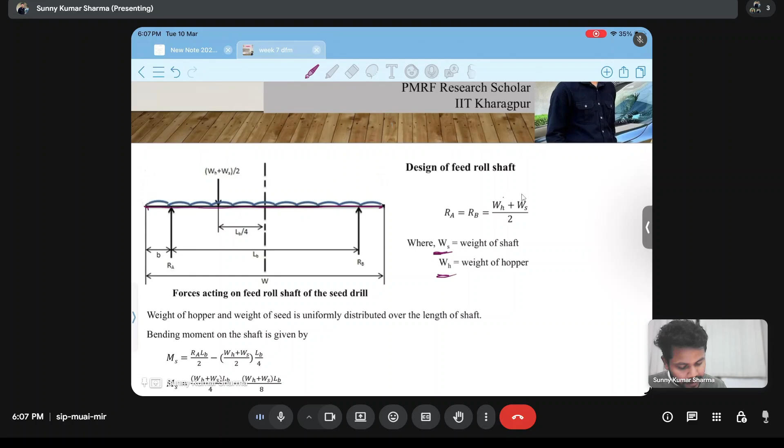So it has its own weight. Suppose WS is the weight of shaft and WH is the weight of hopper. So total combined weight this shaft needs to carry is WH plus WS, and this will be divided in two sections, means WH plus WS by 2.

And this WH plus WS by 2 is acting at a distance of LB by 4, where LB is the distance of this hopper and B is the clearance between the wheel and the hopper. This will not be used. So the seed will be uniformly distributed from here to here.

This RA is acting at a distance of LB by 2, and this RB will be acting at a distance of LB by 2. Good.

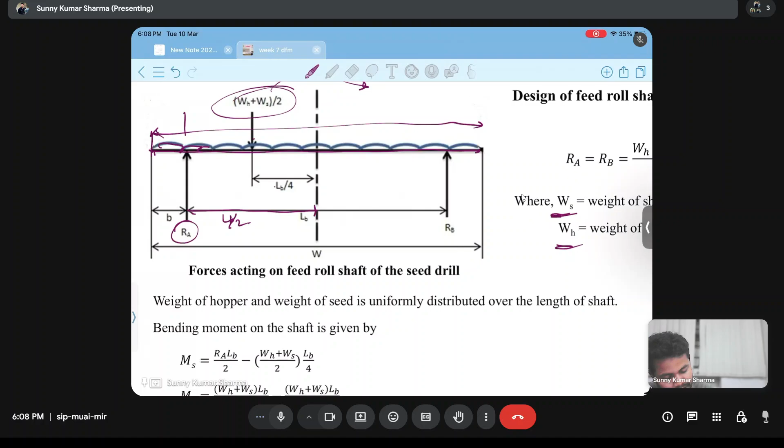So what will be all the forces acting on this shaft? This RA into LB by 2, and this WH plus WS by 2 into LB by 4. This will try to bend this shaft in anti-clockwise direction, and this RA will try to bend this shaft in clockwise direction. So RA you can take on positive side, and WH plus WS by 2 you can take on negative side. So what will be the bending moment?

RA into LB by 2 minus WH plus WS by 2 is acting at a distance of LB by 4. What will be the value of this RA? RA and RB, means RA plus RB will be equal to whole product, WH plus WS.

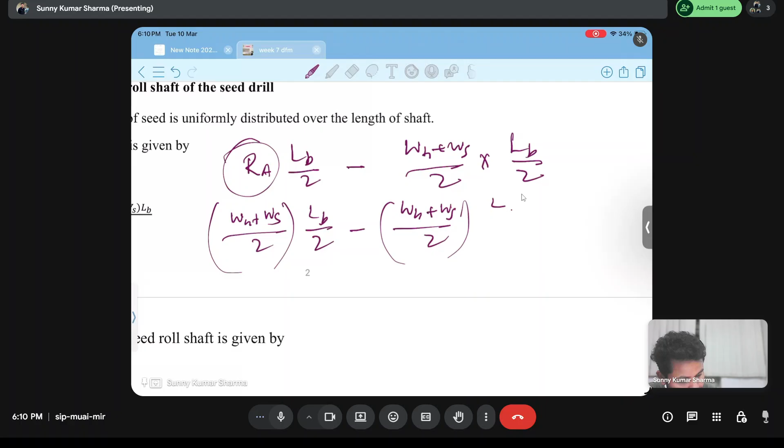This will be balancing each other, so RA will be equal to RB, which will be equal to WH plus WS by 2. So we can put that value here, means WH plus WS by 2 into LB by 2, minus again WH plus WS by 2 into LB by 4, this is actually the distance of LB by 4.

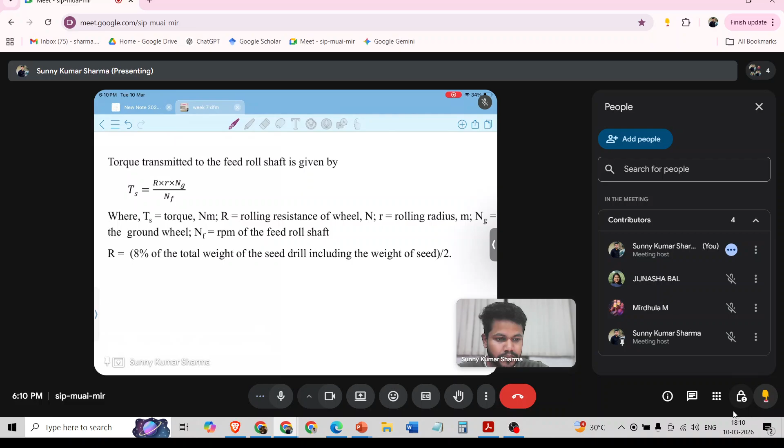So this will be the bending moment and torsion moment. Torsion moment we will calculate.

Torsion moment will be from the ground wheel. Because this is the ground wheel, what rolling resistance is this wheel facing? It will be facing a rolling resistance of R, which is 8% of the total weight of the seed drill, including weight of seed. That whole weight into 8% will be transferred to that shaft, and that will produce torsion in that shaft.

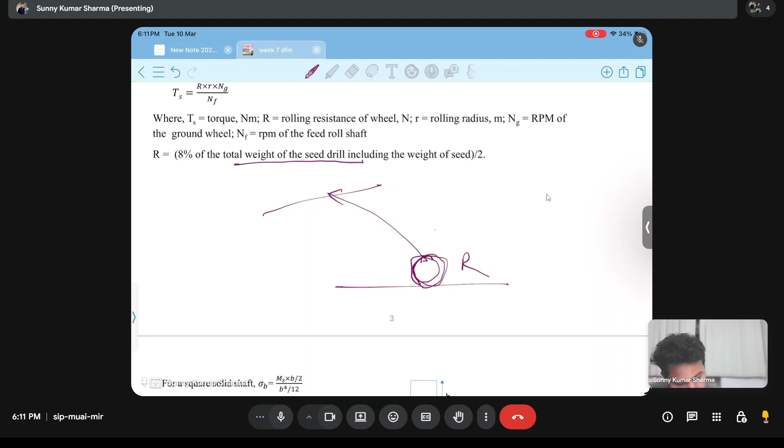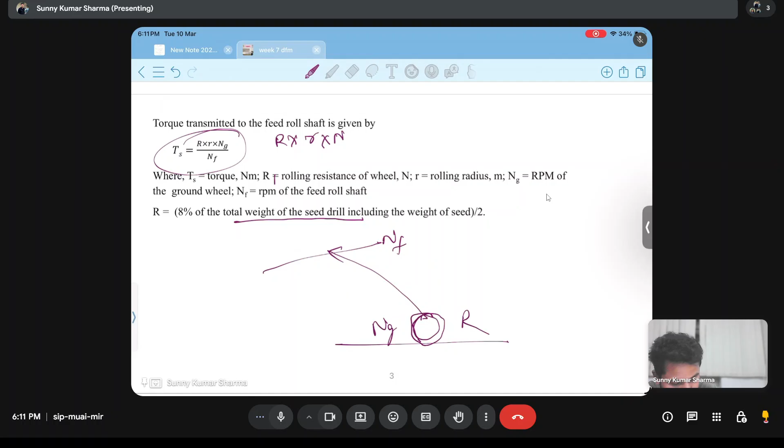So we will take the gear ratio. If the ground wheel is rotating at an RPM of ng, and this feed shaft is rotating at an RPM of nf, then that transmission ratio will be taken, and torsion moment will be the rolling resistance into the radius of this ground wheel R into ng by nf. So this will be the torsion and this will be the bending.

And since we have both torsion and bending, we will use this formula: tau max is equal to half into root under sigma square plus 4 tau square. From this we will solve to get the values.

If we are taking a square section, then for that we will use the formula for bending and torsion both, means y by I for a square section, and everything will be converted into only one unknown, that is b. And knowing sigma and tau max we have calculated, from there we can calculate the dimension of the shaft.

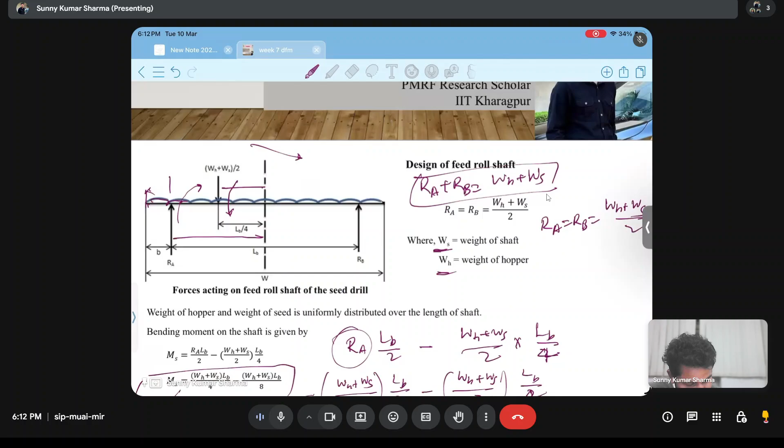For the design of furrow opener, we have discussed in cultivator that the same thing will be applied here. In the seed drill figure attached here, if you see a seed drill, you will find that the furrow opener is same as the working element of cultivator. So design of furrow opener will be same here also.

So for the design, what we are doing here is calculating bending moment and torsion. If the working element is shovel type or full sweep type, then only bending will happen. And if it is half sweep type, then torsion will also come into the picture.

So first we need to know which force will cause bending and which force will cause torsion, in every process we are doing. What force will cause bending on this shank? Is it the vertical or the horizontal force? Within that, we have to think.

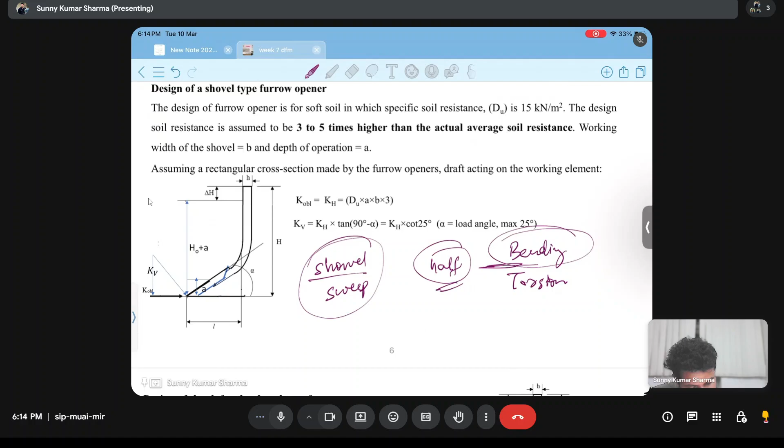So the vertical force will cause bending and the horizontal will cause torsion. Vertical force will cause bending in the shaft, not in the shank. This is just a shank, and this is the shaft, suppose 5 cm there.

So in this shank, which force will cause bending? The horizontal force will cause it. And on this shaft, all the vertical forces will cause bending. That thing you need to understand very well. On this shaft, bending is due to vertical force, and on this side, bending is due to that force.

You're getting it? Yes, sir. That is the key point you need to understand in this shaft.

In this frame, bending will be due to KV, and torsion will be due to KH. KH will cause torsion in this frame because this KH will try to turn or twist this frame, and KV will try to pull it down, this downward force. So KV will cause bending and KH will cause torsion in this frame.

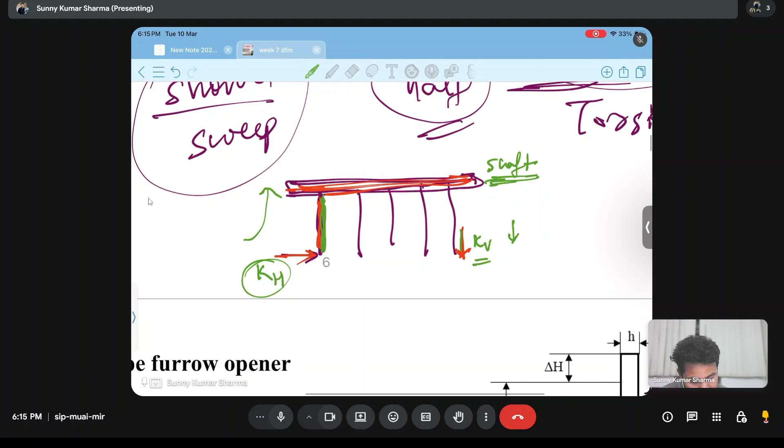And considering only this shank, this shank is subjected to bending due to this horizontal force, that is KH. And what force will cause torsion? KV? No.

First thing you need to check here is whether this working element is symmetrical or not. If it is symmetrical, then there is no question of torsion moment. If it is not symmetrical, suppose a half sweep type working element is there, then torsion will come into play.

This is half sweep type working element. This KH only will cause torsion. KH is causing torsion in this also, and KH will also cause torsion. KH will cause bending in this side, and KH will only cause torsion when it is not symmetrical.

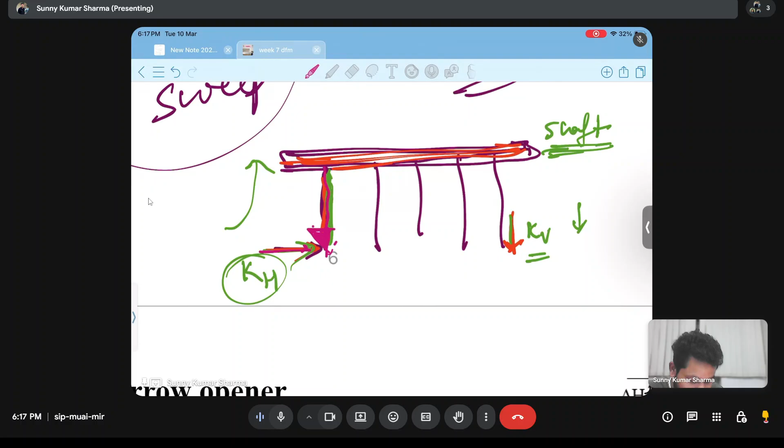Suppose symmetrical at this point, suppose at this point it will try to twist this side. Are you getting? This KH is now trying to twist. This KH will now try to twist this side. So both the forces will act at the same time.

If it's bending, then torsion will be there, or if it is symmetrical, then KH will cause only bending to this shank. And if this working element is not symmetrical, then that KH will only cause torsion in this position.

This thing we have discussed in cultivator class. And at what distance, that also I have shown, like at some distance, suppose working element is of width W, then at W by 2, W by 2, this force, this KH will act to cause torsion.

Suppose W is the working width of this unsymmetrical working element, then this KH into W by 2 will be the torsion moment for this shank. And this KH will cause bending at a distance of this height, this KH into H. This KH will only cause bending and torsion, but at different terms for bending and torsion.

If you visualize, then it will become more clear.

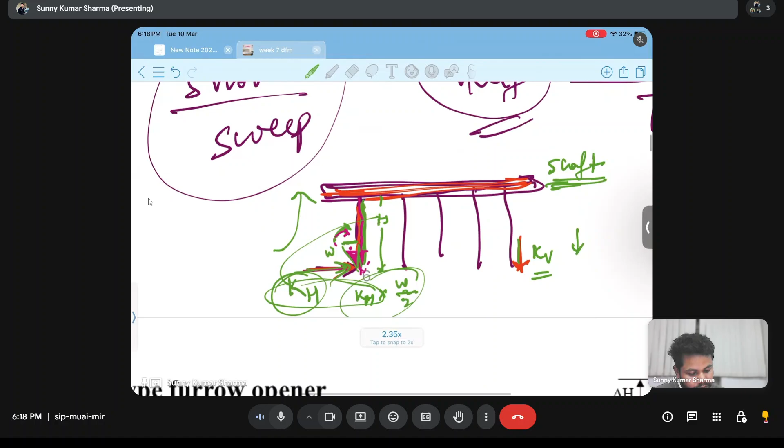So what will be the total height? That also we have discussed earlier. A max plus H1 plus delta H, whatever it will come. Delta H is where the frame is attached, so we can ignore this delta H. So H1 plus A max, H1 plus A, at this height KH will act and it will cause bending.

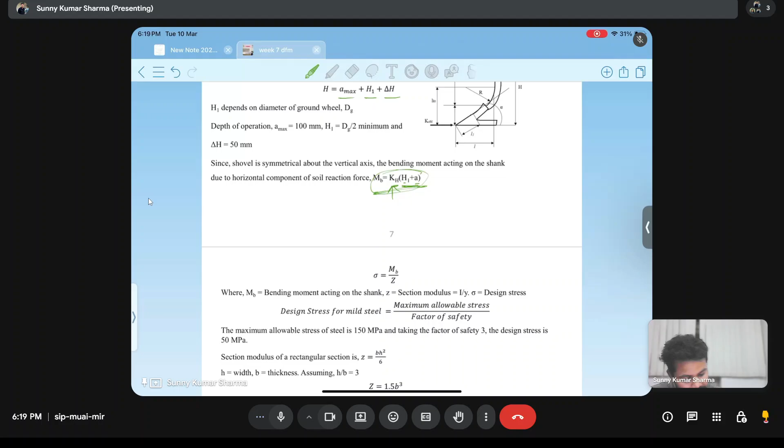I by y is called Z, section modulus, I by y. So this is the allowable stress, and we take some factor of safety.

So design stress will be divided with the allowable stress divided by factor of safety. 150 for 150 is for steel. So 150 by 3 is the design stress, 50 megapascal will be the design stress. That will be equal to Mb by Z. And for rectangular section, BH square by 6 is the section modulus.

And H by B ratio we take as 3 is to 1. And from there, we get only one unknown, that is H will be in terms of B, that is 3B. And from there, we can calculate B directly. So from that bending stress only we have calculated this design dimension concept, that is B.

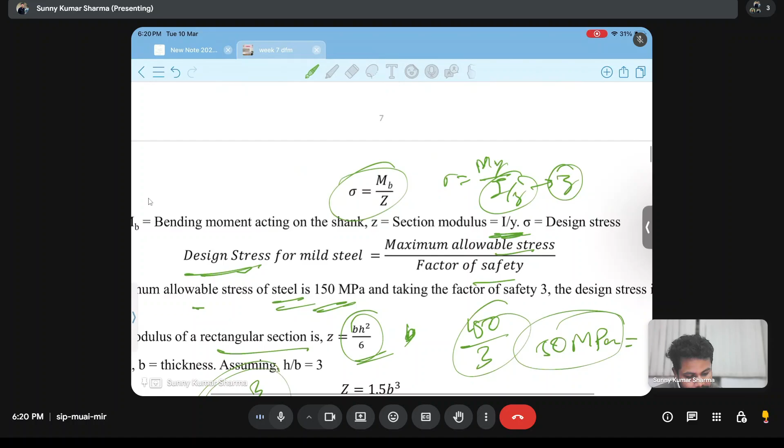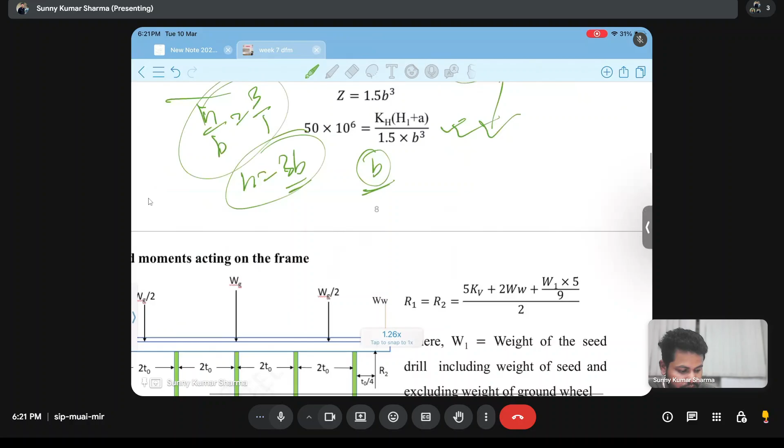Force acting in the frame. Now, just now we have discussed that for this frame, what will be the bend? For this frame, there will must be bending and torsion both. There is no symmetrical or non-symmetrical element.

This will be subjected to bending due to this KV and its own weight, that is some weight of this whole implement, that will cause bending. And torsion will be caused due to this horizontal force, that is unavoidable, that is KH will always be acting at this distance, at the distance of this shaft. So this KH will be causing torsion, and this KV and the mass of the shape will be causing torsion, will be causing bending. In this case, will be causing torsion.

So you can see here that forces, forces and moments acting on the frame. So R1 and R2, if it is a normal reaction, which will be equal to 1, 2, 3, 4, 5 KV.

This weight, and this whole element has a weight of W1. So weight W1 will be the weight of 9 times. So for 5 times, the weight will be 5 W1 and 2.

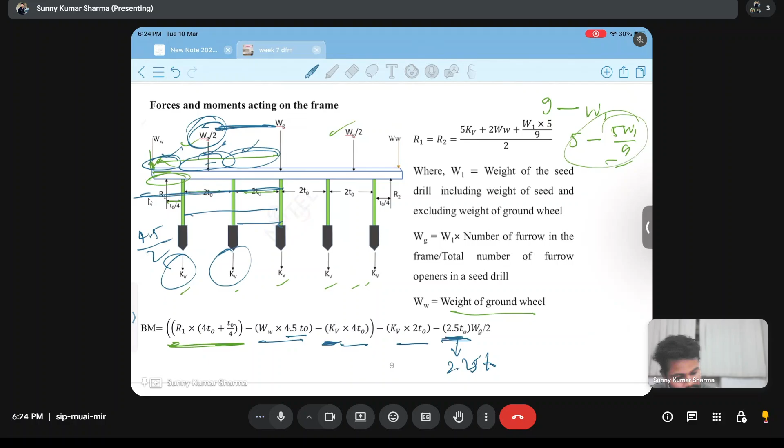So WW is acting at a distance of 4.5 T0, and KV is acting at a distance of 4T0, 1 kV is acting at a distance of 2T0. So 4T0 and 2T0, and the weight of the frame, total weight of this central element, will be divided into parts, that is WG by 2, and it is acting at a distance of this whole weight minus by 2, that is 2.5 T naught. 4.5 by 2, that is 2.25. It should be 2.25 T naught.

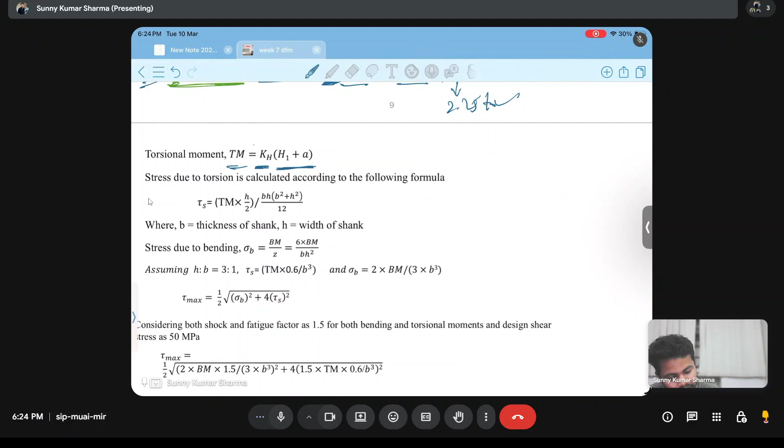So the values now we are knowing, T naught we are knowing, WG we will be knowing, R1 we will calculate from this process, and we can calculate bending moment. And what will be the torsion moment? Torsion moment will be due to KH at the height of shank, so that will be KH into the height of shank. That will cause torsion, and this will cause bending. And from there, we will use that formula: tau max is equal to half root under sigma square plus 4 tau square, and that will give you the design dimension, that is B.

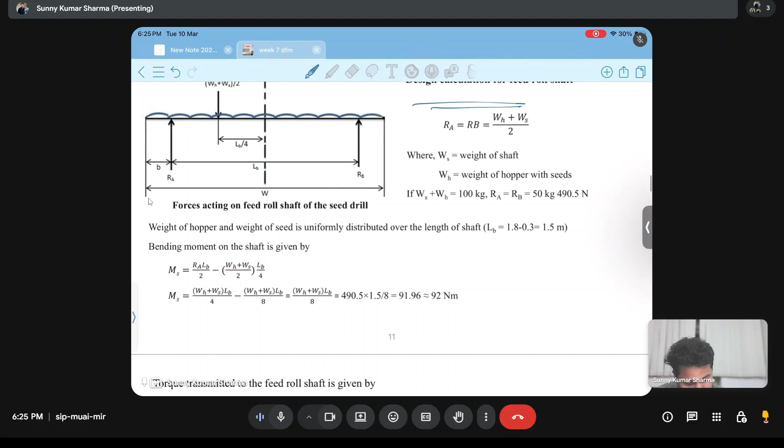So that was the procedure of calculating for designing the feeder shaft and frame. And if we have known values, then you can see the procedure, same procedure that we followed for this design, for this feed roll.

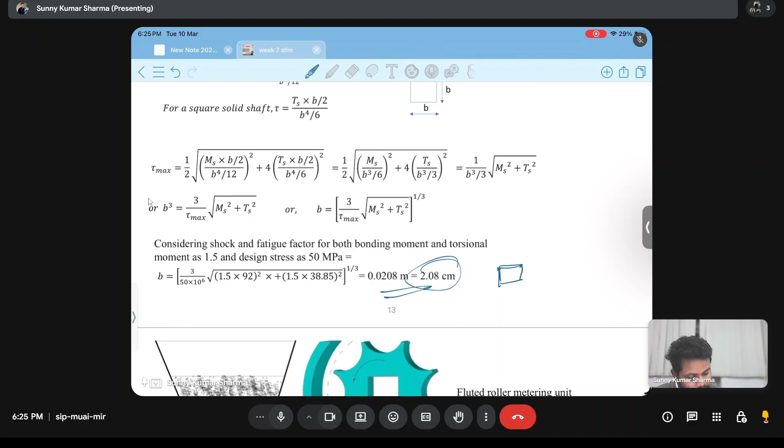Bending moment has come 92 Newton meter. Torsion moment has come 38.85, and we have got B, that is design of shaft dimension, square shaft dimension of 2.08, with a square shaft dimension.

Now the next thing is the metering unit, for fluted roller. This is the design of fluted roller. This is the most complicated thing in the seed drill design. It has two diameters, that is the first thing you can observe. This is the larger diameter, larger radius, that is d by 2. This is the smaller radius, that is small d by 2. But you can denote it as capital R or small r. That is the one thing you can observe.

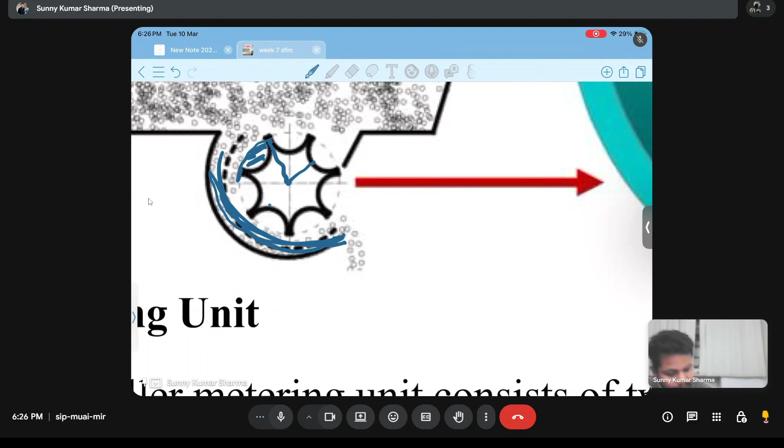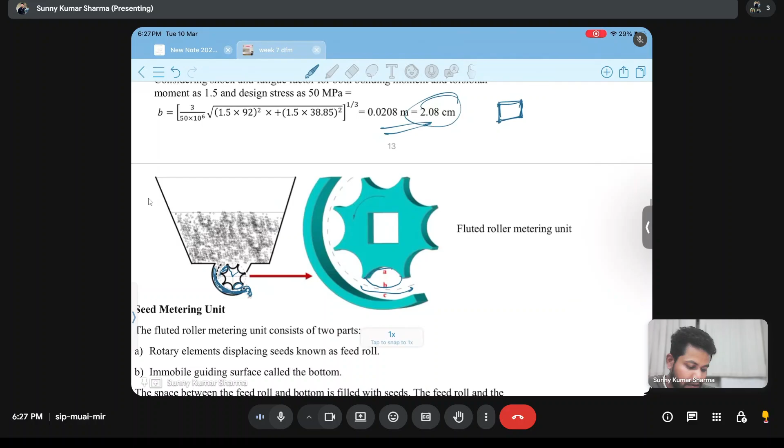Then the second thing you can see: it has two areas. One area is this, and one area is this one, where the grain is sliding. So what is the weight of seed that is coming out in one revolution? We need to consider the area of this unit and the area of the seeds which is sliding also. So that will be coming into picture. Here you can also see this area is there and this area is there. So we will derive the formula for knowing what is the volume of seed coming from this feed roll, from this fluted roll.

So for that, suppose this is the fluted roller. Can you visualize it? It will be having two layers, one internal area and one external area. It will be comprised of this A1 and A2, two areas will be there. And like this, there will be a number of flutes, that number of area we need to consider, and that will be divided into length, area, into number of flutes, into length. That will give a rough picture of what is the volume of seed coming.

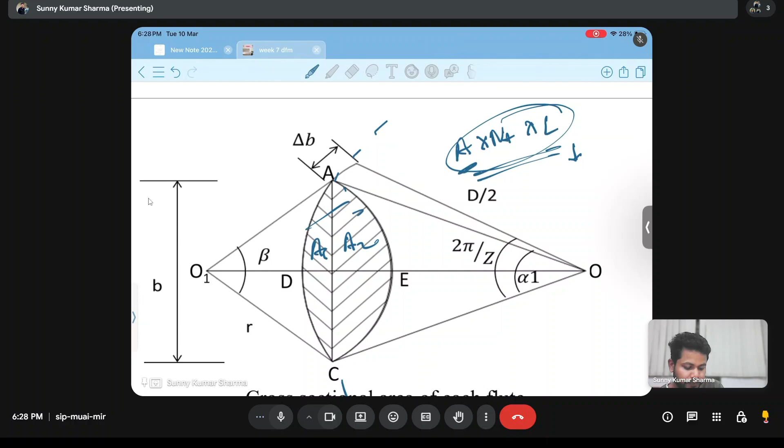Are you getting? You multiplied area into number of flutes. That will give total area of that fluted roller which is of our interest. Only in this area seeds are there, and suppose there are seven flutes, so there will be seven types of this area. And this area is comprised of one external, of larger radius area, and one having smaller area. See this picture. From here you can see there are two areas: one is this one, and one is this one. Getting?

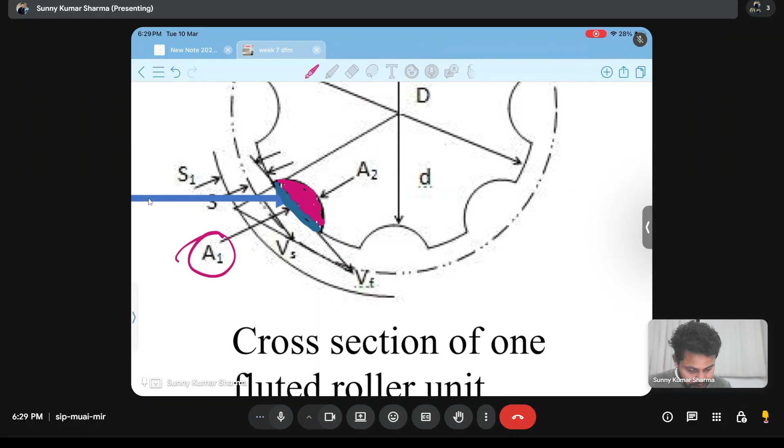Yes sir, to that earlier section you have shown, overlay that one. So this A1, just now I have written it here, this is A1. That is in the picture I have shown it as A1, and this is A2.

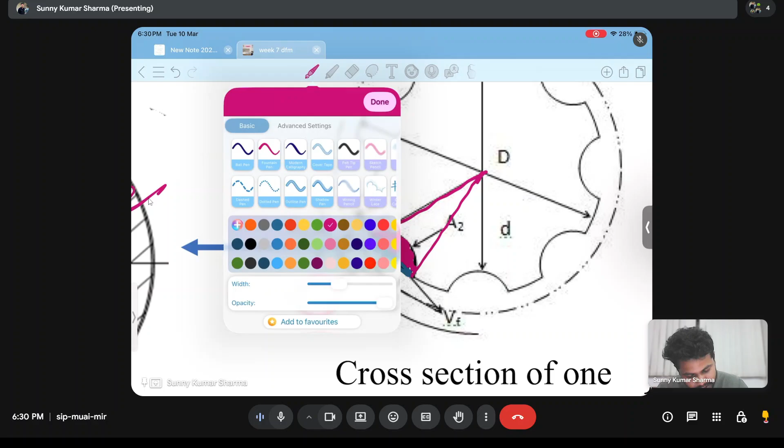It is also shown here. See, this is A1, this is A2. This smaller one, this diameter is small, and for this diameter, this circle is large. It has a larger circumference and a larger radius. For this circle, it will be having a smaller radius. So that thing has been shown here - this is smaller radius, this is larger radius. Getting?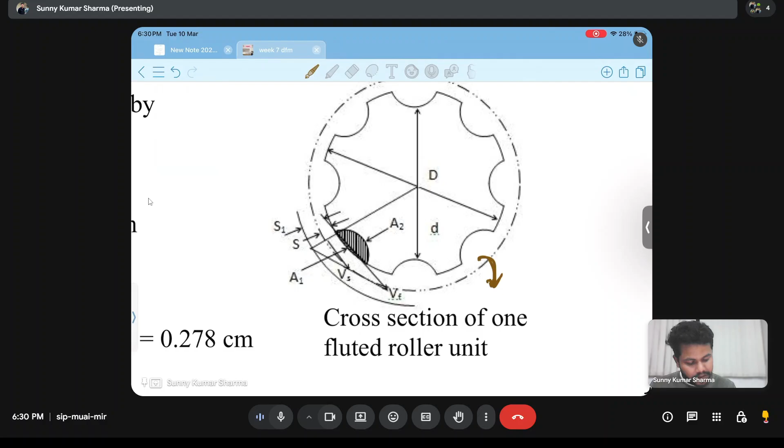Now the concept you need to follow here is what will be the volume of seeds coming out from this feed roll. Suppose some VS is coming, and from the calculations of what will be the seed rate - suppose 100 kg per hectare is the seed rate - from that, what is the desired volume of seed we need, that is the volume of seed coming when this ground wheel is rotating. When this ground wheel is rotating, that feed roll is rotating, that feed shaft is rotating, and that is giving some volume. From that we have discussed many numericals in last class.

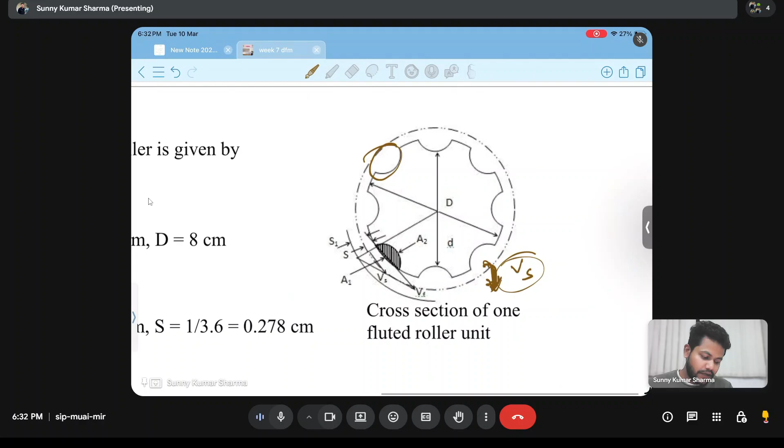Suppose in one revolution of ground wheel, this feed roll is rotating two times. That will give us what is the volume, or what is the amount in kg, of seed that is dropping from this feed roll. That is one procedure we have seen inside the feed roll - what is the volume of seed coming from this. That is from there one volume is coming, and from this calculation, what is the speed and what is the gear ratio - from there one volume is coming. So suppose from this example we will get it.

Suppose what is the area covered when the seeding machine is operating at a speed of 4 km per hour, and it has a working width of 9 into 20 centimeter. So what will be the area covered per minute? 4000 by 60 meter per minute into 9 into 20 by 100 meter. This is the width it is covering, and this is the distance it is covering in 1 minute. So when you do this multiplication, you will get that 613.33 meter square it is covering in 1 minute.

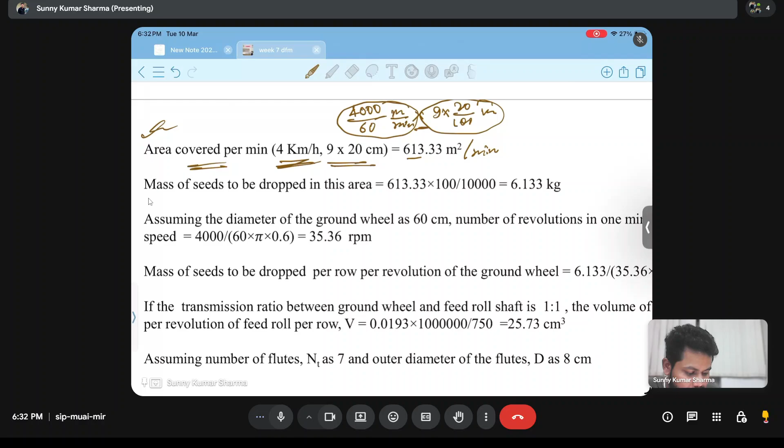Excuse me, sir. Sorry, sorry for the interruption, your voice is not very much clear, sir. Yes. No, your voice is not very much clear actually. Okay, I will wait 1 second. Is it better? No sir, just speak on, sir. Wait 1 second. Now I think it's okay, sir. While I am speaking, I'm getting that resound also. Wait, let me rejoin, I will rejoin. Hello. Yeah, now it is okay, sir. Is it okay, or you are just saying okay? It is okay, sir, it is okay. Now there is no disturbance. Okay.

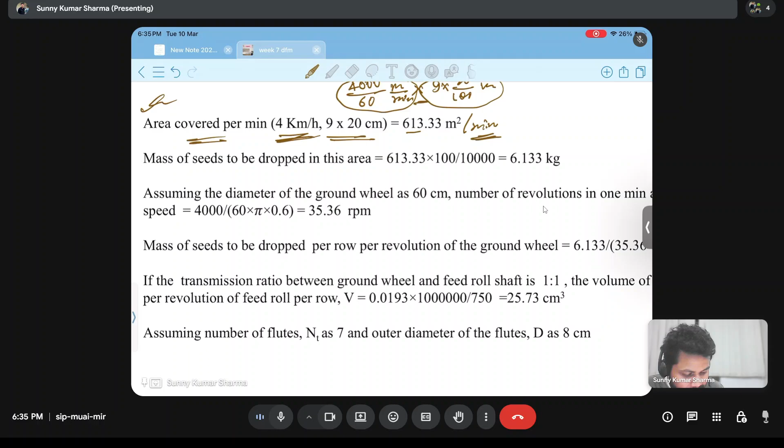So suppose the seed drill is covering this area in 1 minute, and mass of seed to be dropped, that is the seed rate, is 100 kg per hectare. Suppose 100 kg should be dropped in 10,000 meter square. So for this area, what will be the seed in kg? For 1 meter square, it will be 100 by 10,000 kg, and for this area it will be this into amount of 613.33. So we will get 6.133 kg. For this area, 6.133 kg should be dropped.

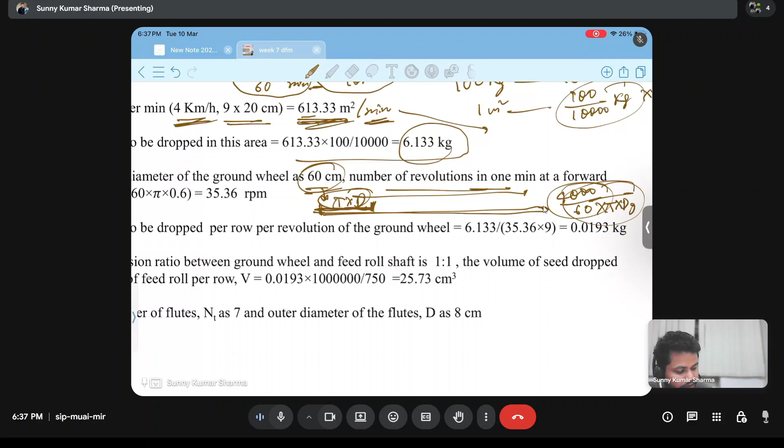Assuming the diameter of ground wheel is 60 centimeter, what will be the number of revolutions in 1 minute? In 1 minute, how much distance is it covering? 4 kilometer per hour means 4000 meter by 60 - that is the distance it is covering in 1 minute. This is the diameter of the ground wheel, so from there circumference will be pi into d. This is the distance it is covering in one revolution. Total distance it has covered in 1 minute is 4000 by 60, so 4000 by 60 divided by pi into d gives the revolutions per minute, which will be 35.36. So this is the RPM of the ground wheel. And for this RPM, the mass of seeds to be dropped per revolution - in one revolution, what is the mass of seed being dropped?

6.133 divided by 35.36, that will be the mass of seed in one revolution. And it has 9 rows, so that will also be divided.

So this amount of seed for one revolution, we will divide by number of revolutions, and number of rows will also be divided. So this will give 0.0193 kg.

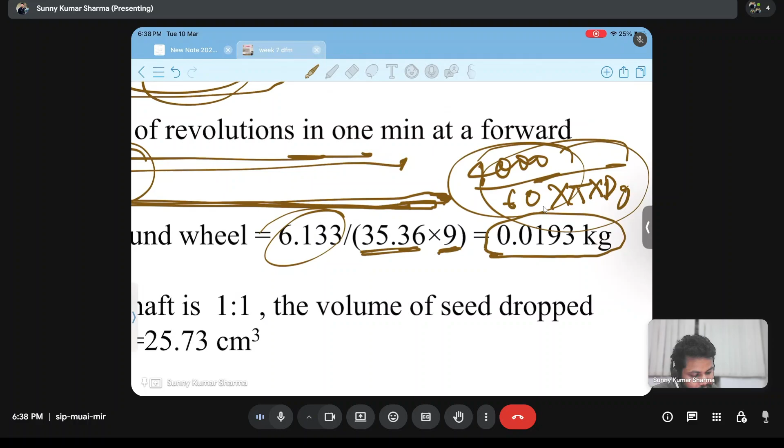So this amount of seed is being dropped by one fluted roller in one revolution. In one revolution, this amount of seed is being dropped one time, meaning from one time this amount is coming.

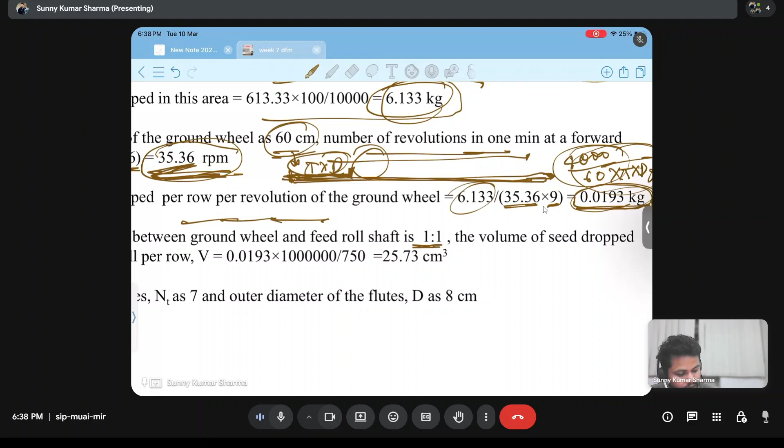And if the transmission ratio from ground wheel to feed shaft is 1:1, that means in one revolution of ground wheel, the feed shaft is rotating one time.

So this amount of seed will only be coming out. And suppose for one ground wheel revolution, two times that shaft is rotating.

So what will be there? This seed is coming in one revolution of ground wheel, and in that same time, the feed shaft is rotating two times.

So in one time, what will be the amount of seed coming from that metering unit? This amount divided by two.

Are you getting? Yes, sir, I'm getting. Jigyasa, are you getting? Yes, sir.

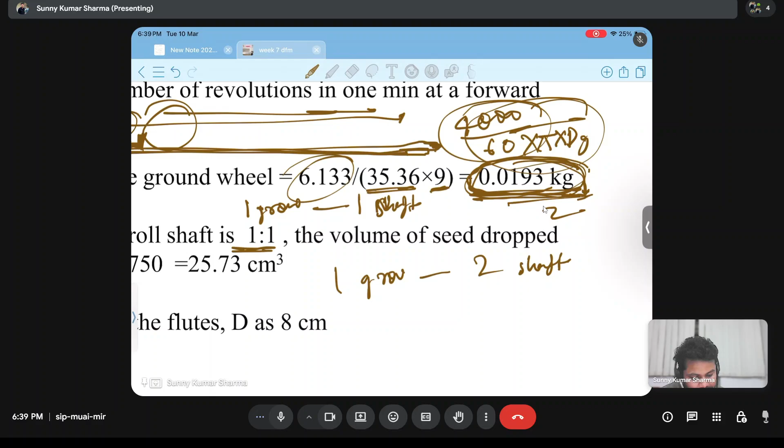So if in one revolution of feed shaft, ground wheel is rotating two times, then what will happen?

Sir, come again, sir.

If ground wheel, if for one rotation of that feed shaft, the wheel is rotating two times, then what will happen?

This is the feed shaft. It is rotating two times, and in that two times, this ground wheel is rotating only one time.

Sir, can you just zoom out that value, sir? Still more, sir.

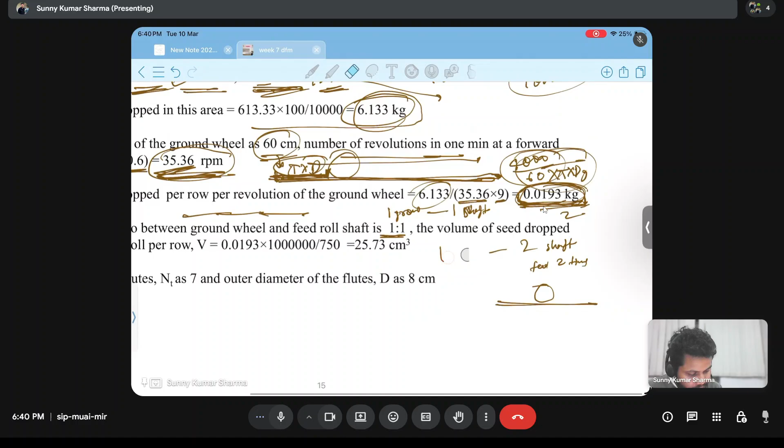This concept needs to be very clear, then only the schedule problem will be solved very easily.

I'm saying that in one revolution of ground wheel, feed shaft is rotating two times. Then what will be the effect of that transmission ratio on this amount?

Volume will be reciprocal. Here it is 1:1, meaning one revolution of ground wheel rotates the feed shaft one time. And if one revolution of ground wheel rotates the feed shaft two times, then what will happen?

The volume of that seed which is dropped, what will happen? Volume of seed dropped per revolution by the feed roll will decrease, it will decrease by 2 times.

We need to consider only one revolution. For 1 ground wheel revolution, it is rotating 2 times. So this amount is coming in 2 revolutions of the feed shaft.

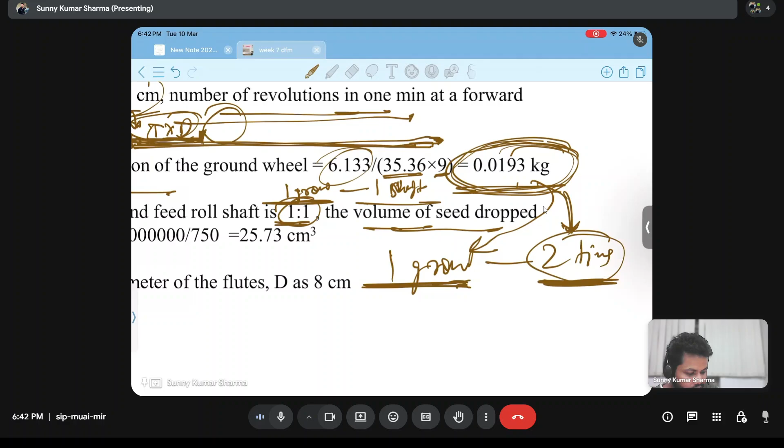Either you can say this amount is coming in 1 revolution of ground wheel, or you can say that this amount is coming in 2 revolutions of feed shaft. This is the concept you need to understand, that this amount is coming in either 1 revolution of ground wheel or 2 revolutions of feed shaft. That will make you clear.

So this amount is coming in 2 revolutions of feed shaft, meaning 1 revolution of feed shaft will give this amount divided by 2. That is the importance of that transmission ratio. Okay, sir. Okay.

So this amount is coming, and density of seed is here taken as 750 kg per meter cube.

Meaning in 1 meter cube, the mass of seed is 750 kg. So this kg will be converted into volume, that is 25.73 centimeter cube, in 1 revolution of feed shaft, roll shaft.

In 1 revolution of feed shaft, what is the volume coming? 25.73 centimeter cube.

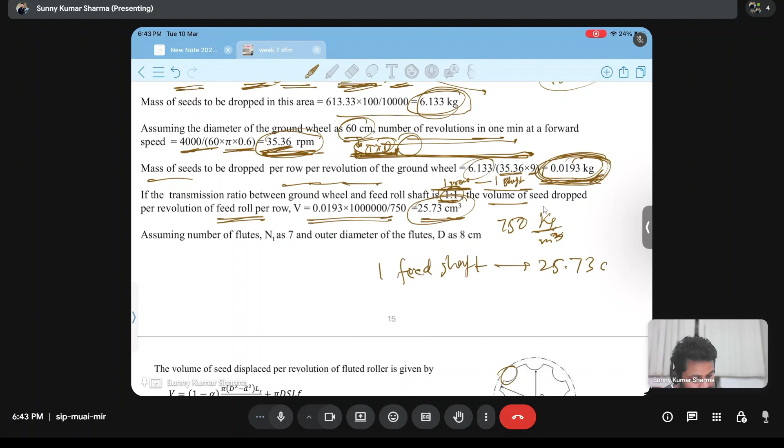This is the calculation from the ground wheel side, like what is the speed at which the seed drill is operating, and what is the transmission ratio.

From that side, we have found that 25.73 centimeter cube should be dropped by the feed shaft in 1 revolution.

This part is complete. And another part which we are discussing from the beginning is what is the volume that should be coming out from this dimension, which we will also discuss.

So it has two formulas. Volume of seed displaced per revolution by the fluted roller is given by this formula.

This is a direct formula for when we know the diameter, that is the larger diameter and the smaller diameter.

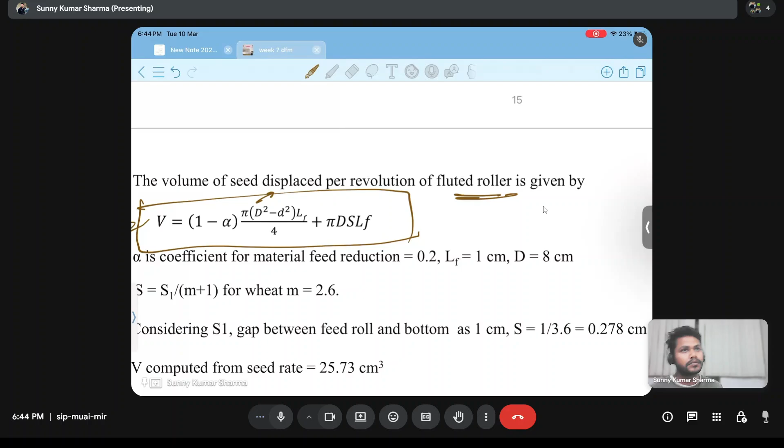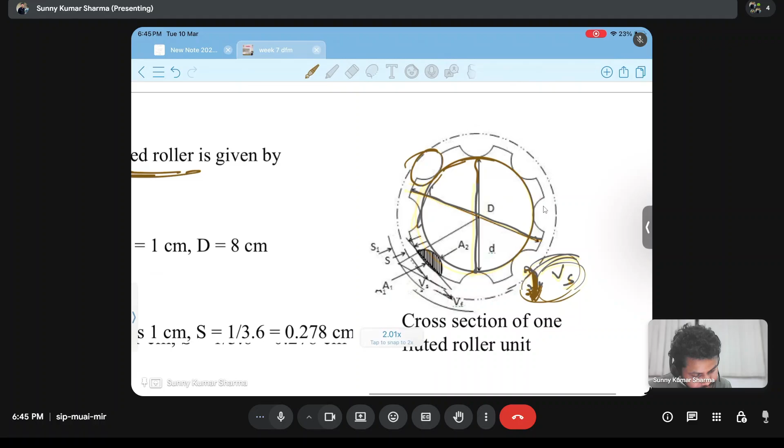If the porosity is suppose alpha, say 20%, that amount is occupied by air. So we do 1 minus alpha into pi D square minus d square, where D is the larger diameter and d is the smaller diameter. This subtraction gives us the area for the larger diameter minus the area for the smaller diameter. So 1 minus alpha is the porosity, and LF is the length of flute.

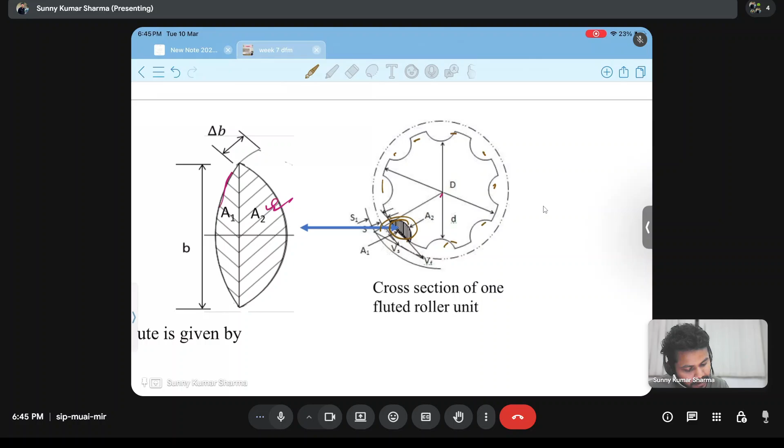Another way we were discussing is that this area multiplied by the number of flutes, along with the area and length of flute, will be used. For calculating this area, it is comprised of two areas, A1 and A2, and we will derive how to calculate A1 and A2.

A1 is the part of this larger circle having radius d by 2, and this other area is part of a smaller circle.

Sir, both the formulas are accepted? Both formulas will be acceptable, it depends on what is given. If, suppose, just scroll up sir... okay, so here you are telling that we are taking the area of a circular ring, using the larger diameter, and subtracting the smaller diameter from the larger diameter, to get the area of that circular ring, right? Yes. But if we take the circular ring, we are covering some area which is not dropping the seed, right? That's why this formula will be more suggested to use. Yeah, that's what I'm asking.

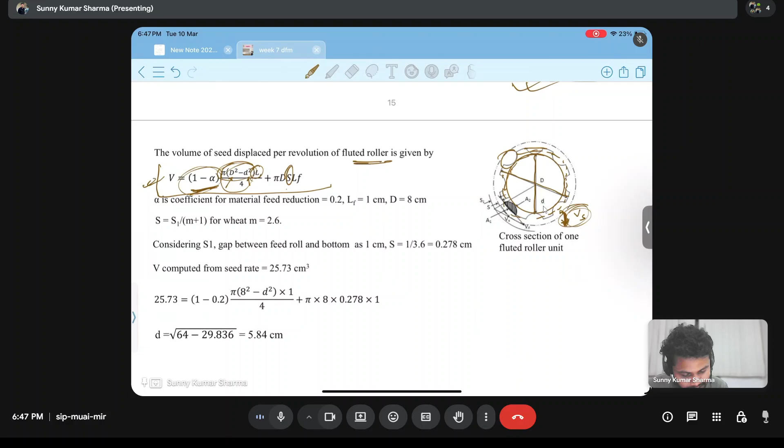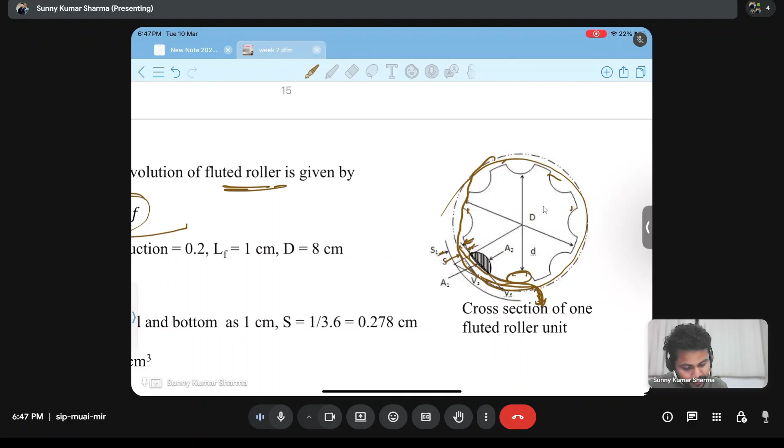Here, for calculation of this area, S is also important. This part is indicating the volume of seeds which is sliding along this periphery - this is S1 and this is S. So this part of the seed is also coming out and should be considered; that part plus this part need to be added to give the volume. For calculation of S, we have the formula S1 by M plus 1, and M for wheat is 2.6. From there S will be calculated, and then this diameter can be calculated.

Actually, I got that, but I think the second formula is more relevant, because we are exactly taking the volume of the semicircles, right? That is more accurate. More accurate because in the others, we are also covering some area which is not dropping the seeds. Yes, okay, carry on.

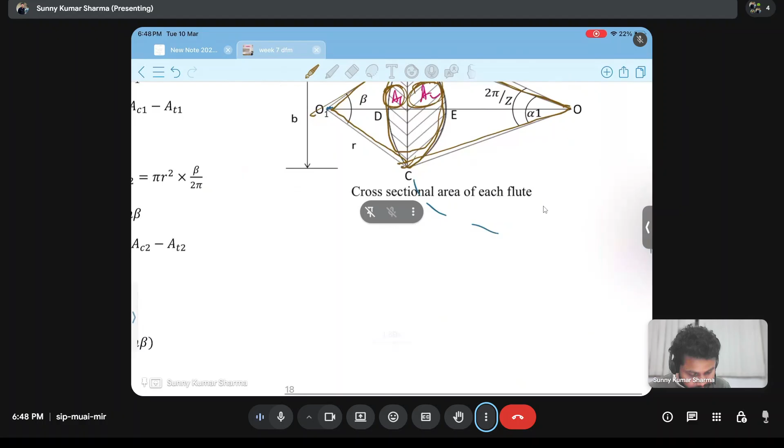This area is A1 and A2. For calculating A1 - what will this be? This conical shape is called a sector, right, one sector. Yes, correct, we'll call it a sector.

So what is the area of this sector? For 2 pi, the area is pi d square by 4. So for alpha, this area will be pi d square by 4 into alpha by 2 pi. This is the area of the sector.

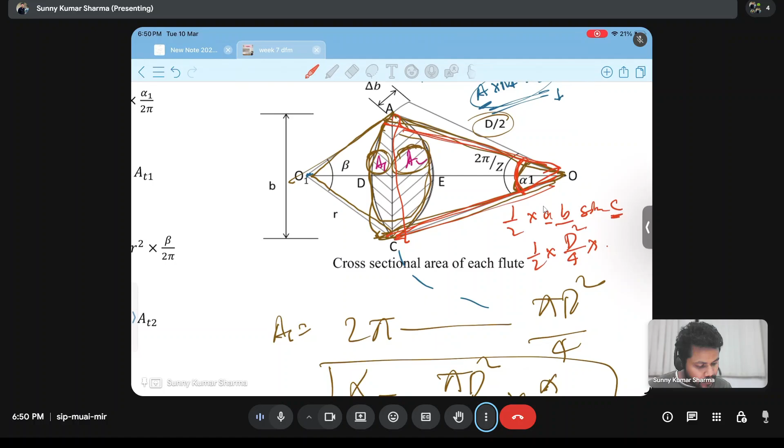That larger sector area should be subtracted by the triangle's area. For the triangle's area, one formula is half AB into sine C, where A and B are the sides of the triangle and C is the included angle between them. Here this is d by 2, and this is sine alpha. So half into d square by 4 into sine alpha will be the area of the triangle, giving d square by 8 into sine alpha.

So this area minus this area becomes d square by 8 into alpha minus sine alpha. This is the area of A1.

B is regarding that thing. This area which we are not considering, delta b, which is not dropping the seed, that thing we also need to consider. And that area, if we are knowing A1 plus A2, then number of flutes we are knowing and length we are knowing. Area, that is dropping the seed into number of flutes, that will give total area into the length, that will give volume.

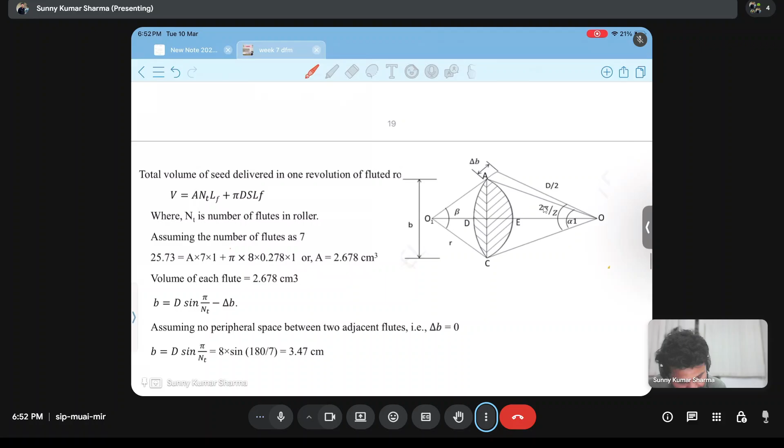What will be the gear ratio? What is the ground wheel? From that side we are getting one volume, and what one volume we are getting from this side. So we need to equate both the equations to get the desired value which is being asked, which is to be designed.

So 25.73 is the volume of seed being dropped in one revolution of ground wheel, and area into 7 number of flutes into capital D is 8 into 0.278 is the S, then 1 is length of flute. From here we can calculate area as 2.678 centimeter cube.

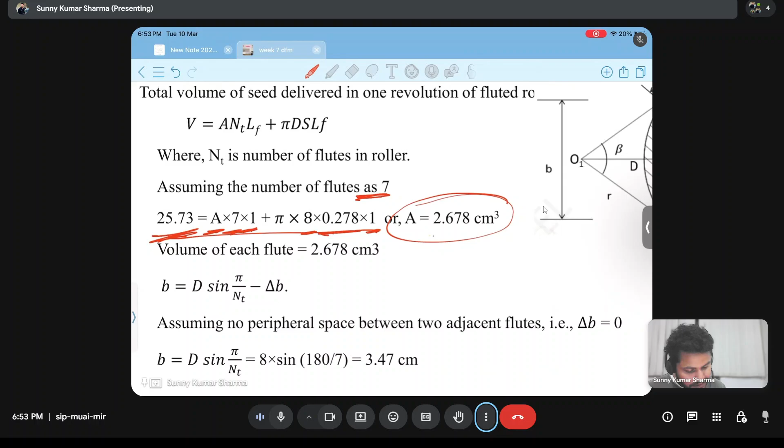And B, we have this formula, so we can calculate B also, 3.47. So here, if suppose I think B was asked, so this was done.

And design of hopper is also there. Design of hopper is simple only. First you need to know what is the hectare per hour from field capacity. Actual field capacity, first you need to know. For that, you need to know the width. W into S by 10 is the famous actual field capacity formula. You need to multiply it with field efficiency. You will get what is hectare per hour.

So for that hectare per hour, you need to know at what time you need to refill. Suppose 1.4 hours, you are refilling the hopper. So this amount, this area, this hour will be multiplied and 0.576, so this much area is being covered. And what is the seed rate? Suppose 100 kg per hectare. So this will be the amount of seed for which the hopper needs to be designed.

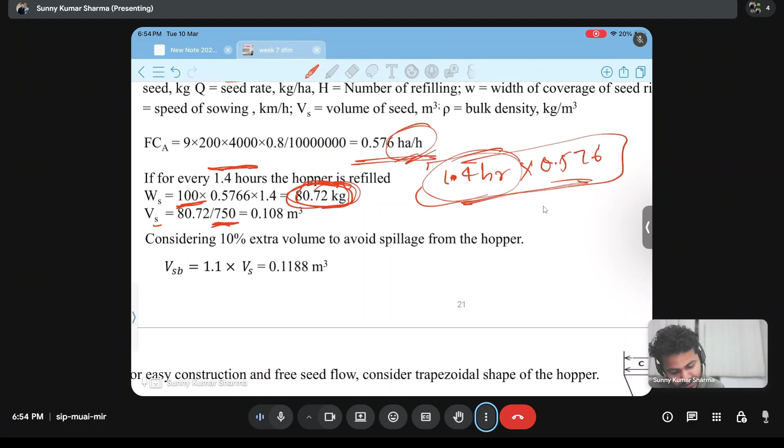And this is the amount in kg. You need to know what is the density of the seed. From that, the volume of seed will come. This will be the volume of seed coming from the actual field capacity. And if you are taking a trapezoidal cross section, then there are some standard theta and c values which you need to know, but from there you can calculate what is the dimension of hopper.

So in this week's session, these were the questions. We will solve these questions now.

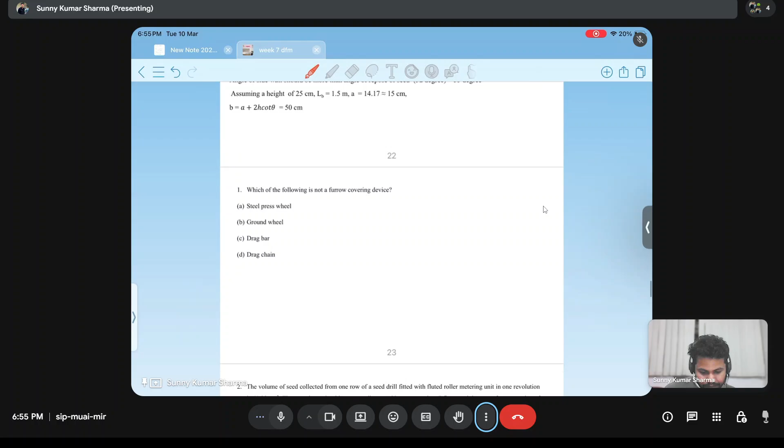So furrow covering device we have discussed in last class. So which of the following is not a furrow covering device? Round wheel, sir. Yes, ground wheel. Press wheel is a furrow covering device. Drag bar is drag chain, this we have discussed. Right, these, sir, all are furrow covering devices. And ground wheel will be the answer.

So the second question is: if the volume of seed collected from one row of a seed drill fitted with fluted roller metering unit in one revolution is 41.32 centimeter cube. This is the volume of seed collected in one revolution of seed drill from that fluted roller. And the metering unit, with outer diameter 80 mm, comprises 7 flutes. Area of cross section is given as 2.5 centimeter square. So, assuming the coefficient of material reduction is 20%, the thickness of active layer is 4 mm, meaning that is S.

The exposed length of fluted roller in centimeter will be what? What will be the LF, the length of fluted roller?

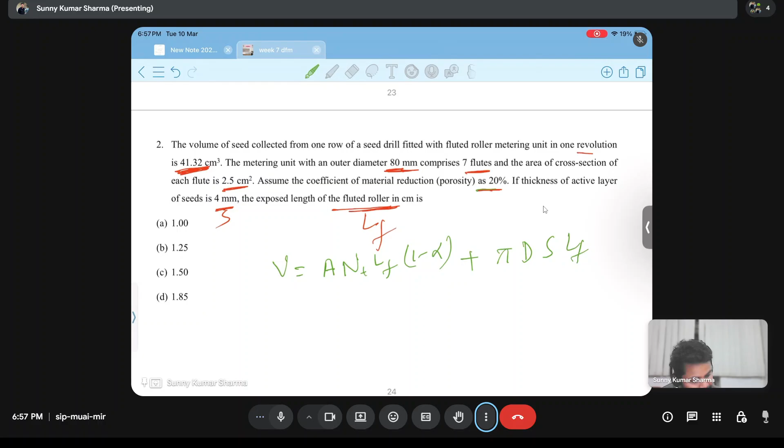So, 1 minus alpha into area into NT plus pi d s. This should be equal to 41.32. Alpha is given as 20%. Area is given as 2.5 centimeter square, and there are 7 flutes. Diameter, outer diameter is given as 80 mm, and thickness of active layer is given as 4 mm. So calculate this value.

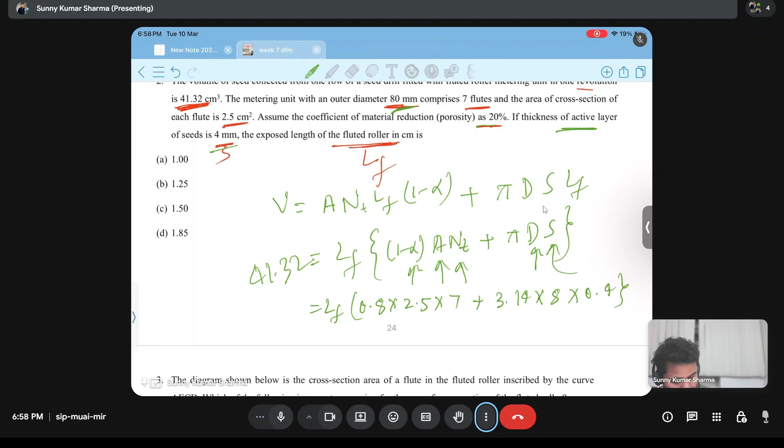Okay, that is coming now. Jigyasa, are you getting that value? Okay, means 1.85 will be the answer.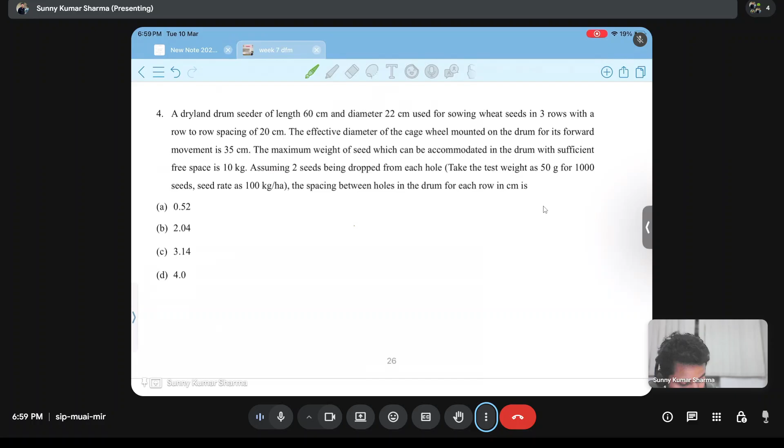Now, whatever we have seen from that only, you can design a drum seeder. Drum seeder is nothing but there is a drum which is attached, mounted on a shaft, and there are a number of holes on its periphery. So if we know the concept of seed drill, we can solve these questions.

So here it is asking that a dryland drum seeder of length 60 centimeter has a diameter of 22 centimeter, for sowing wheat seed in 3 rows, with a row to row spacing of 20 centimeter.

The effective diameter of cage wheel is 35 centimeter. It has a cage wheel. There is a picture of seed drill that I will show in next class, which has a cage wheel that rotates this shaft. So this cage wheel has a diameter, and it gives power to the shaft. That is the basic thing. So a 35 centimeter ground wheel type thing is there, called cage wheel, with an effective diameter of 35 centimeter.

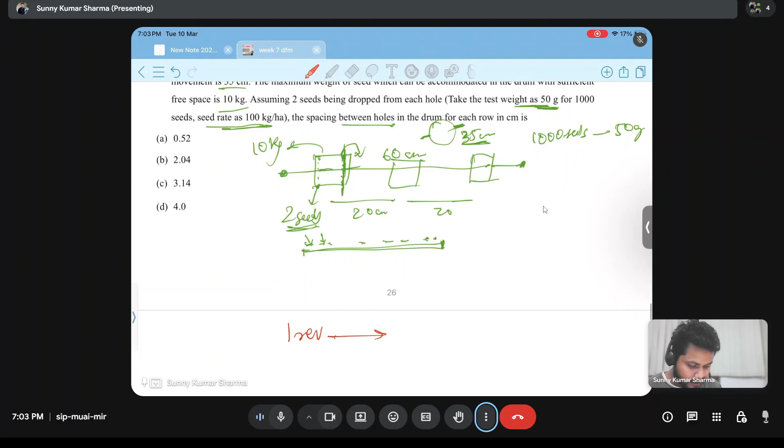So first calculate what is, in one revolution, the area covered by this seed drum seeder. Diameter of ground wheel is 35 centimeter, so pi into dg will be the distance, and what will be the width? Width is 3 into, it has 3 rows at a spacing of 20 centimeter, meaning 3 into 20 centimeter. This is the width and this is the distance, pi dg.

So 3.14 into 35 centimeter is 0.35 meter, giving 0.65. In one revolution, it is covering an area of 0.65 meter square.

And in one revolution, this 100 kg per hectare is the seed rate, meaning 10,000 meter square needs 100 kg. In this area, 100 kg of seeds is to be dropped. So in this area, what will be the seed drop? 100 kg by 10,000 into 0.65, giving 0.0065 kg.

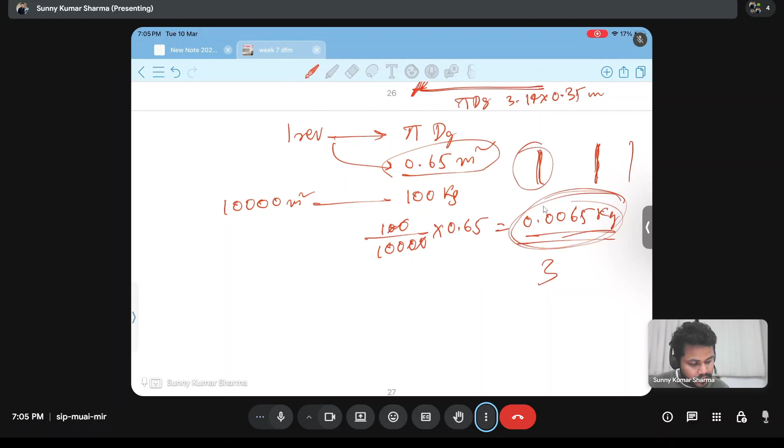So here it is clear. This kg is being dropped in 3 rows, in one revolution. So this divided by 3 will be for one row. You're getting 0.002198 in one row.

So this amount is being dropped in one revolution. Now you have to see how many seeds this amount comprises. 50 gram was meaning 1000 seeds, that was the test weight. So 50 gram has 1000 seeds means this amount will be how many seeds?

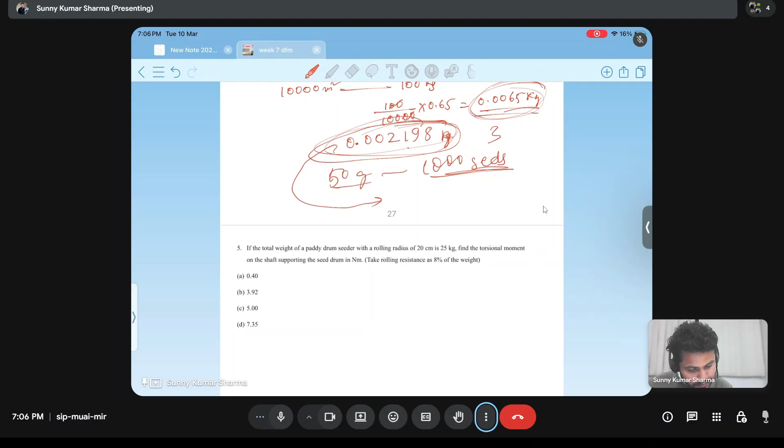0.043 seeds. You have done some mistake - kg is there, here it is gram, so do it carefully.

In 1000 you are leaving... Jigyasa, kg you need to convert in gram.

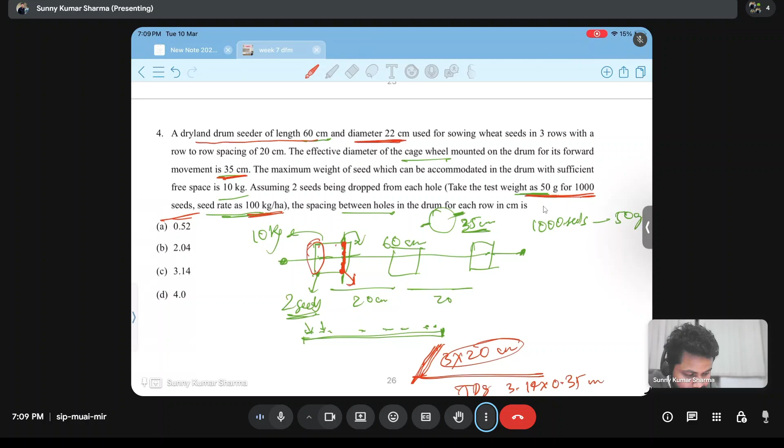So drum has a diameter of 22 centimeter. So 2 pi r you can do, 2 pi r divided by 22. 3.14 sir. Means 2 into 22 by 7 into radius is 22 by 2, into 22. So 22, 22, and this is cancelled. This is 3.14. Option C, sir, 3.14.

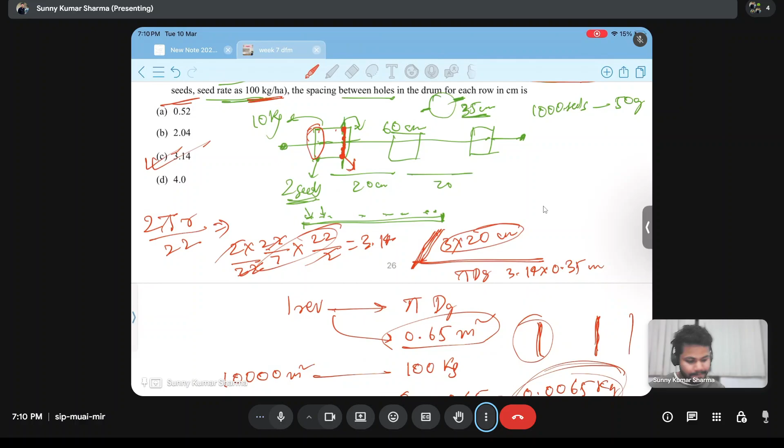Yes, this we have solved. This was a lengthy question. I think if you get this question this week, then it will be very easy for you.

So next question is, if the total weight of paddy drum seeder rolling radius 20 centimeter is 25 kg, find the torsional moment on the shaft supporting the seed drum in Newton meter. So what is the torsional moment? Taking rolling resistance as 8% of weight.

8% of total weight means 0.08 into total weight of 25 kg. So you have to convert it in Newton, that is into 9.81. This is the force acting, and at what distance it is acting? At rolling radius of 20 centimeter. Directly multiply it with rolling radius, that is 0.2 in meter, and this is in Newton. So this is Newton meter of torsional moment acting.

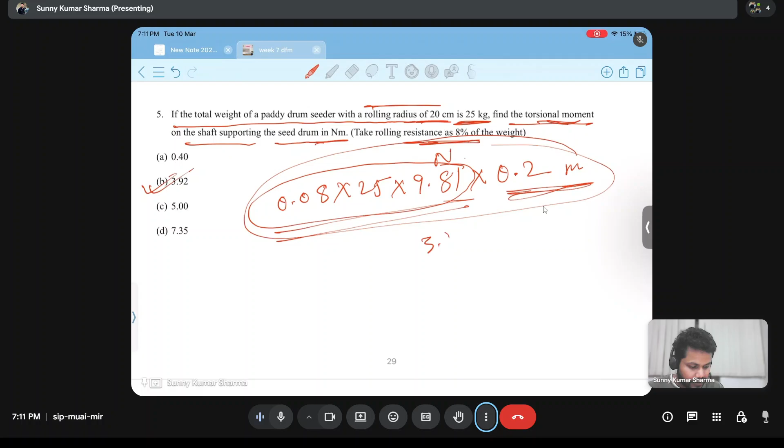This amount is in Newton, and at this moment R, that force is acting, and that is given. Option B, sir, 3.92. So option B, 3.92 Newton meter.

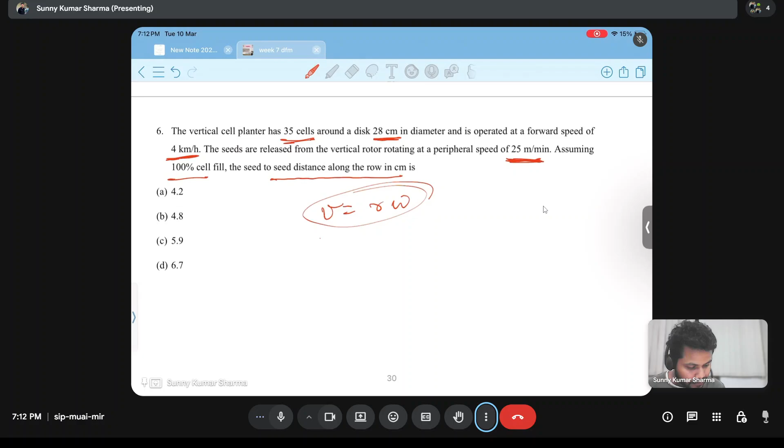So this is linear velocity, and velocity is equal to r omega. And omega is 2 pi n. So finally we need to know what is RPM. So what will be the RPM of rotor, and radius is given. From there we can calculate seed to seed distance along the row. We first need to calculate what is the RPM. So any idea how to solve this? So from V equal to R into 2 pi n, we can calculate RPM.

Vs is given here, so from there... okay. This is given like 28 centimeter diameter, so pi into 0.28, this will be pi. Pi into d is the formula for velocity. So pi n into d is equal to 25 meter per minute. So from here you can calculate n, what is RPM? 28.4349, 28.43 rotation per minute.

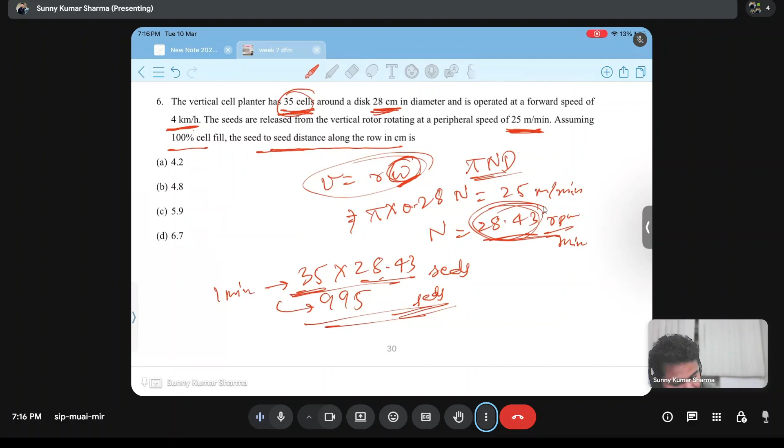995.2229, so approximately 995.5, that's what I'm getting. This amount of seed, suppose you can consider it say 995 seeds. So this amount of seed is coming in 1 minute. And in 1 minute, how much distance is it covering? 4 kilometer per hour, so in 1 minute, what is the distance it is covering? 4000 by 60 meter it is covering in 1 minute. And in 1 minute, this amount of seed is being dropped.

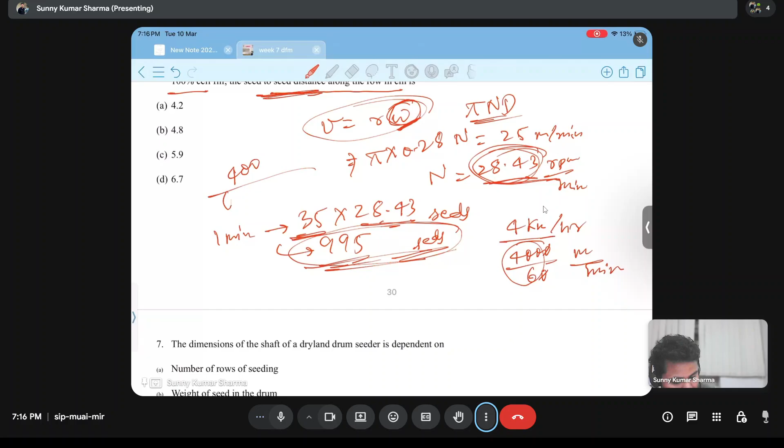So from there, you can calculate seed to seed spacing. So 4000 by 60, what meter it is there, and this you divide by 995, means 400 by 6 into 995 will be the spacing of seeds in meter. Here it is asking in centimeters, so multiply with 100.

Option D, sir, 6.7 centimeter. Okay, option D, which is there, 6.7 centimeter.

Next question is: the dimension of shaft of a dryland drum seeder is dependent on number of rows of seeding, weight of seed in the drum, weight of the cage wheels provided for propelling the drum seeder. All of this versus all of this.

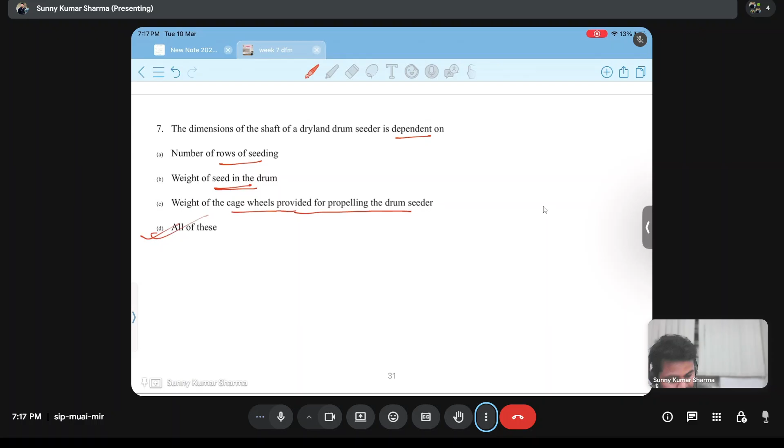Option D. Next question is quality of feed index, which we have discussed in previous class, week 6. Answer option C, sir.

Option C. So while deciding the size of hopper, the factors to be considered are seed rate, working width, and number of fillings. Option D, sir, all of this.

Next question is which of the following statements is not correct for seed tubes used in seed drill and planter?

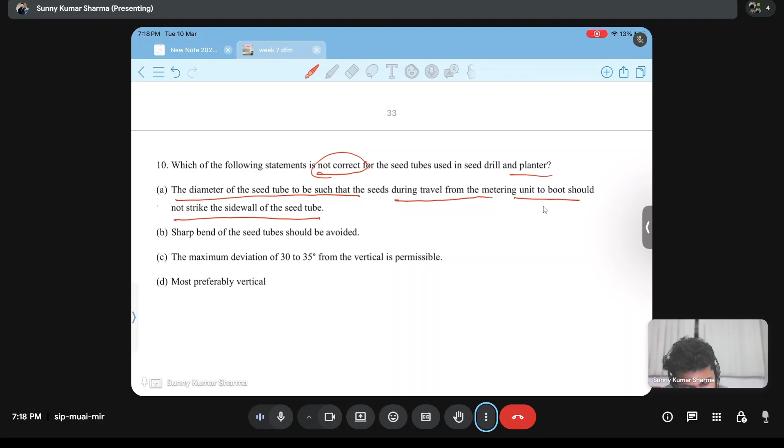The maximum deviation, option C I think, sir. This D amount has some different value - this degree maximum deviation. So C will not be considered. There are some values, but this amount has been changed. That's why C is incorrect, it is not correct. Most preferably vertical is also correct.

So this question we have solved regarding week 7. So if you solve week 7 today - when is the last day?